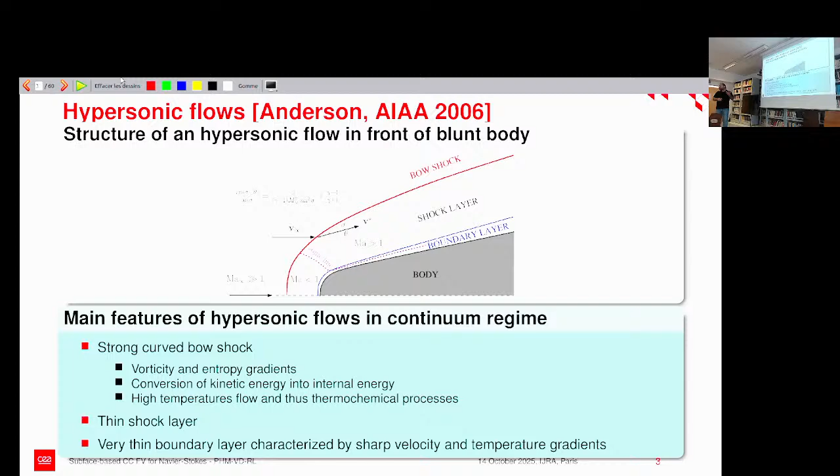And this shock wave is a converter of kinetic energy into internal energy, so the temperature will go up, and you will have a lot of complex thermochemical processes. Due to the fact that you have a thin shock layer, you have also an interaction between the entropy layer and the boundary layer. So this is a very complex physical configuration for the numerical methods, because at the same time you need to be accurate and you need also to be very robust to cope with the shock wave, and very accurate to discretize properly this very thin boundary layer.

So the mathematical model is very well known. This is the model of the compressible Navier-Stokes equation. In blue, you have the hyperbolic part, the non-viscous, non-heat conducting part, which is very well known under the name of Euler equation. And at the right-hand side, you have the viscous stress tensor and the heat flux here. So we use classical constitutive laws plus an equation of state, which might be a little bit complex because due to the thermochemical processes at play in such a flow, you cannot use the classical gamma gas law.

Usually you have a very complex model. This is why I mentioned that for real-life hypersonic flows, a larger number of equations has to be solved, usually with all the chemical species. But in our case, since we are interested in designing a numerical method, we will start simply with the classical Navier-Stokes equations, knowing that the extension to real gas effects is not a problem.

Up to my knowledge, most existing production codes for hypersonic flows rely on finite volume discretization. This is a non-exhaustive list of well-known simulation codes. One exception is the code designed by Dassault people, Michel Mallet and Frédéric Chalot, the AETHER code, which is based on an SUPG formulation, a very original and nice piece of work.

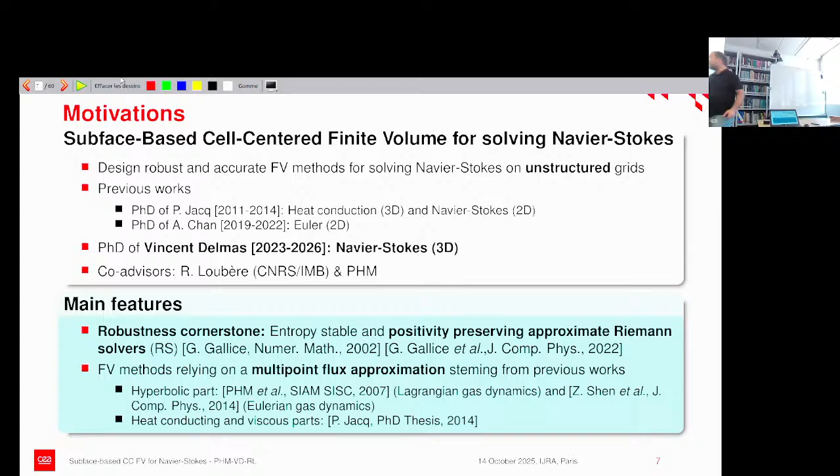Each time, the flux approximation on this face depends on the two states on both sides of the face. This is what I call a two-point flux approximation. For a structured quadrangular grid, this gives a 5-point stencil. In our case, we want to involve also the diagonal neighbors, the other neighbors, introducing a multi-point flux approximation. This is the main idea, and I can skip the slides after because it's technical detail.

I imagine that you know the governing equations, so the multi-dimensional Euler equations with a classical assumption on the thermodynamic closure. Eta is the specific entropy. We assume that we have a convex internal energy potential and a complete equation of state, assuming that the absolute temperature is positive, and so this system is hyperbolic.

You have the eigenvalues here. D is the dimension of the space, and A is the isentropic sound speed. This system is equipped with an entropy inequality in order to discriminate the physically admissible solution when you have discontinuous solutions.

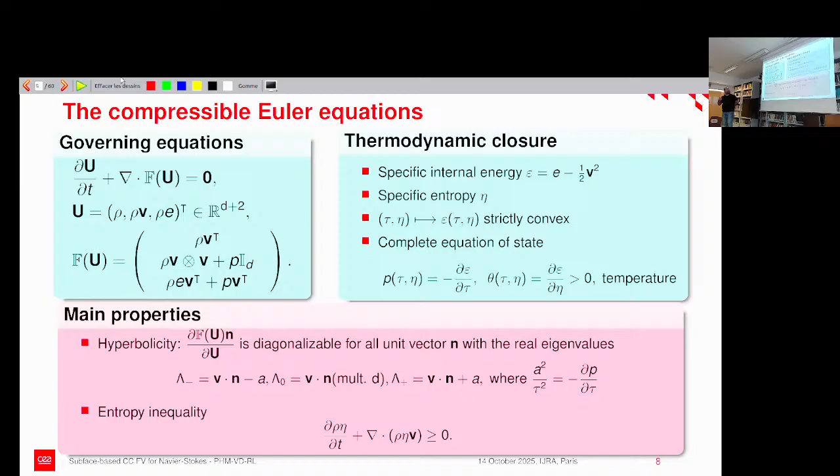So we are interested in designing an interface flux approximation. To construct the flux approximation, we use the cornerstone given by the approximate Riemann solver. For this, we need to define the Riemann problem, so I take the tensorial flux here and project it along the normal direction n, where n is normal to the face of the mesh, and I define this 1D Riemann problem.

I also have the corresponding entropy inequality, and in local notation there is a little abuse of notation because I'm using notation related to the normal and tangential components relative to the face. You recognize the decomposition of the velocity. I just want you to notice that the flux admits a decomposition between two parts: an advective part here with the normal velocity, and a kind of Lagrangian part.

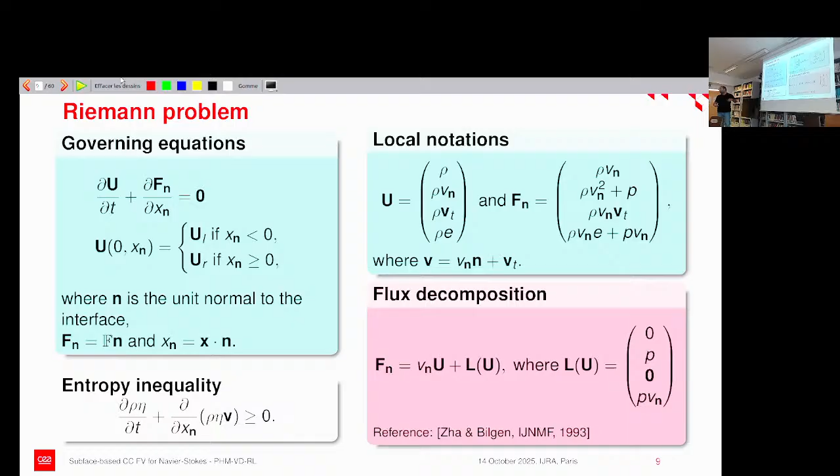Okay, so this natural splitting will be the cornerstone of our numerical methods design. We will reproduce this when we will build our Riemann solver.

So let's go to the notion of simple approximate Riemann solver. This notion has been introduced by Gallice more than 20 years ago. We don't want to use an exact Riemann solver because, practically speaking, it's not possible to use it due to the complexity and the cost of this approach. That's why we go to an approximate Riemann solver.

So I recall you that this approximate Riemann solver is an approximate solution of the Riemann problem I have shown you before. This is a self-similar solution depending on these self-similar variables, and we introduce three wave speeds because this is a complete Riemann solver that mimics the exact solution to the Riemann problem.

And when we set this approximate Riemann solver, we introduce what we call the intermediate states, the UL star, UR star. And what we want to compute is the solution when we have two discontinuous states on both sides of an interface, and we want to go from this state to the flux, in fact. So the intermediate states are written like this.

So I introduce some unknowns, rho star, all the components of the physical variables here. And I will introduce also intermediate fluxes. And you can notice that I use the same decomposition - I mimic the physical decomposition in between advective and Lagrangian part. I impose this decomposition to the intermediate fluxes. So it's a rather strong hypothesis.

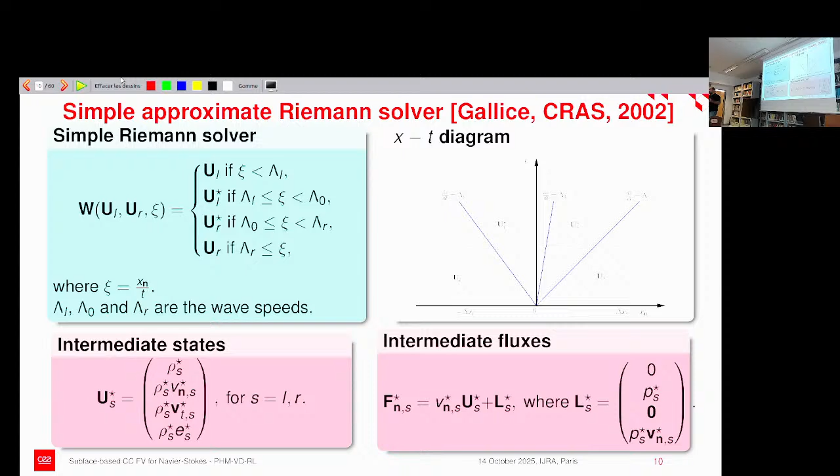And what we're going to do here is that we will impose the continuity of the normal velocity, which is a rather natural assumption. Here, this is the contact wave, and we want the normal velocity to be continuous through the contact, okay? But we will decide to keep a discontinuity in between the pressure, intermediate pressure. This means that we will have a discontinuity through the contact wave between the left and right-sided pressure. This is a rather strange assumption, but this will be the key to derive something different than usual, okay?

Because if I assume PL star equal to PR star, then I will have an equal number of equations and unknowns, okay? And the system is closed, and we will finish with a classical Riemann solver, HLLC type, in fact. It's not really a HLLC, but it's very close to HLLC if we do that.

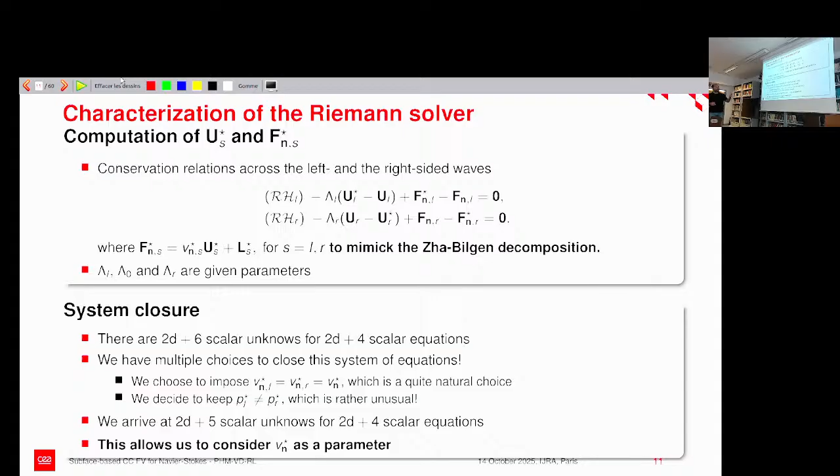So if I maintain the number of unknowns, one more unknown than equations, I can use one of the unknowns as a parameter. And this is precisely what I will do. I will use Vn star as a parameter, okay? And I will show you how I will use this parameter.

And now, if I'm replacing the decomposition of the flux here and here inside the Rankine-Hugoniot equation, and I simply write the first component of those equations, which is related to the mass density, I end up with two mass conservation equations through the left-sided wave and the right-sided wave, like this.

And since mass is conserved through those waves, I can introduce what I call mass flux parameters. It's just a change of unknowns. I will introduce the small lambda, which are the Lagrangian mass, in fact. All these manipulations amount to coming from the Eulerian world to the Lagrangian world, in some sense. I am making a kind of change of variables, in fact.

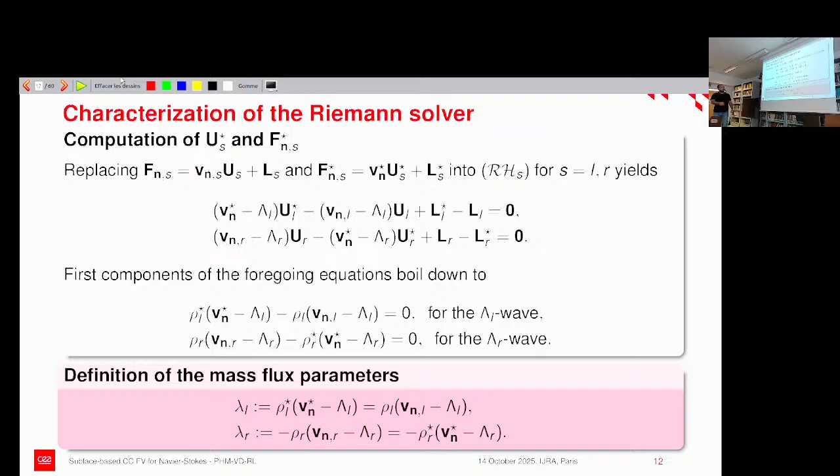And so if I introduce those small lambda L and lambda R, then I can define the wave speed, the Eulerian wave speed, in terms of the small lambda parameters. And I have the right to do that if and only if those compatibility conditions are satisfied. You can observe that this equation is exactly equivalent to that one, and that one to that one.

Okay, and that's why I have written this. So if I introduce this small parameter lambda L, lambda R, my conservation relations boil down to those expressions. The advective part has disappeared, and it remains only the Lagrangian part. Here you have the big U divided by rho, and these are the Lagrangian conservative variables, in fact.

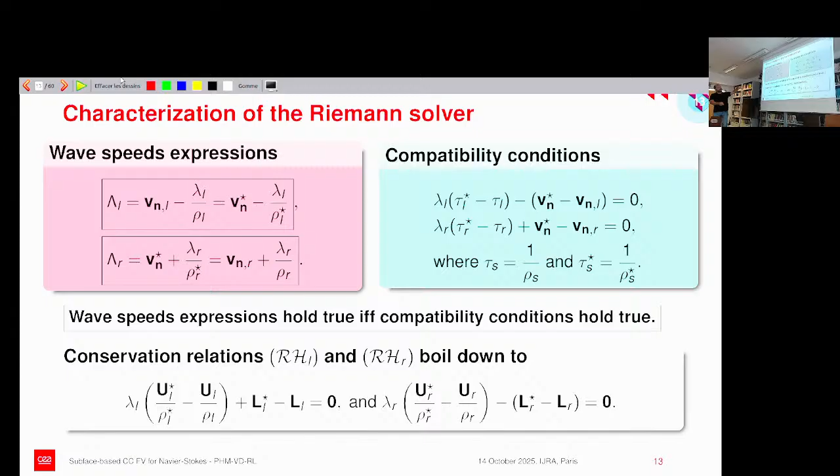Okay? So if I develop completely the left-sided and right-sided equation, I end up with those two systems of equations for the left wave and the right wave. And these are a kind of Rankine-Hugoniot equation.

But beware, be careful. This is not exactly the Rankine-Hugoniot equation due to the fact that here PL star is not the pressure given by the equation of state. It's an unknown, okay? And so I have still 2D plus 5 unknowns for 2D plus 4 scalar equations, and I have my parametrization using the parameter Vn star.

Now it remains to enforce positivity. That is, I want the specific volume in the intermediate state to be positive. I want the specific internal energy to be positive, and I will show you how to obtain that. I need to express the lambda zero wave speed, the contact wave speed, remember, and I need also to determine the interface flux to fit the finite volume discretization.

So this is explained in this Computers and Fluids paper. If you tune the lambda, the small lambda, then you can find values of lambda that will ensure the positivity of epsilon star and tau star. This is a non-linear expression because it depends also on the parameter.

Okay, this simply means that if you need to have enough entropy, you simply open the fan of the solver. Once you have this, then you have the wave speeds ordering, which is very important for us. That is, you can ensure that the right wave is the right wave, the left one also, and the contact is in between, which was not obvious at all, knowing that Vn star is the parameter, okay?

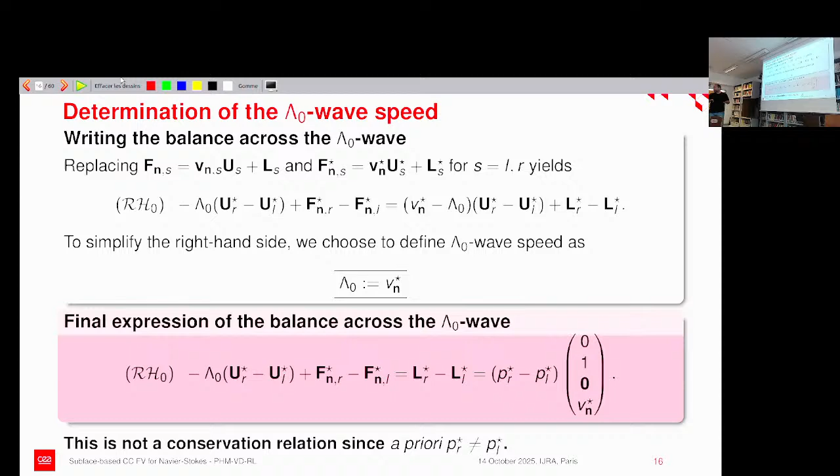Remember, I have assumed that those two pressures were not equal. So, for sure, if I assume that those two guys are equal, then I am conservative and it's finished. Okay? This is the classical way of defining the numerical methods.

Now, let's play a little bit with the theoretical framework introduced by Harten, Lax and Van Leer in their very famous paper, the paper where the HLL theory has been introduced, the approximate Riemann solver theory.

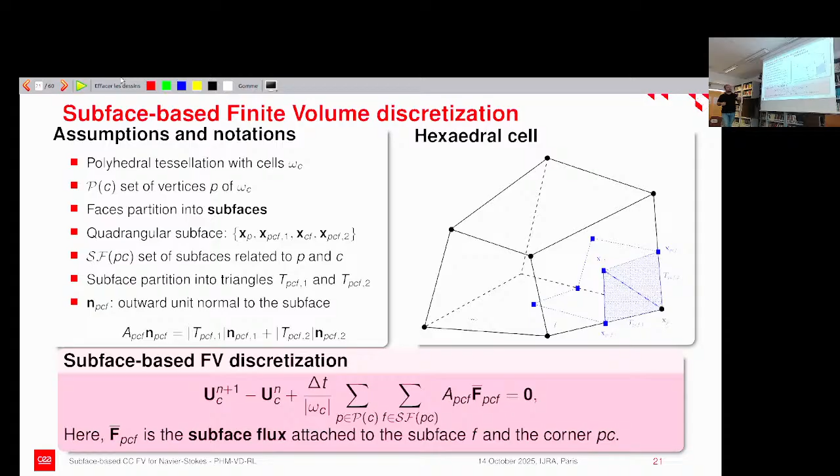So in practice, you can do this decomposition with whatever polyhedral cells you have. And so the main idea here is to have a subface-based finite volume discretization, in the sense that the flux is approximated on each subface. That is, instead of making a summation over all the faces of the polyhedral cells, now we are making a sum over all the nodes of the polyhedral cells, and for each node we are collecting the contribution of all the subfaces. Okay? And here, for instance, for this node, we are collecting those 3 contributions.

Now it remains to define what is this subface flux. Okay, so the same story. We define a Riemann problem along each subface, a Riemann problem in the direction of the normal to the subface, so the NPCF stuff. Well, P for point, C for cell, F for face. It's quite easy for French people.

To compute my flux here, I will use a parameterized Riemann solver, exactly the Riemann solver I have defined previously, with the Vn star velocity as the parameter. Here the left and right states are UC and UD, and Xi is the classical self-similar parameter. I will use the definition of my subface flux using the left-sided part of the numerical flux from the Riemann problem.

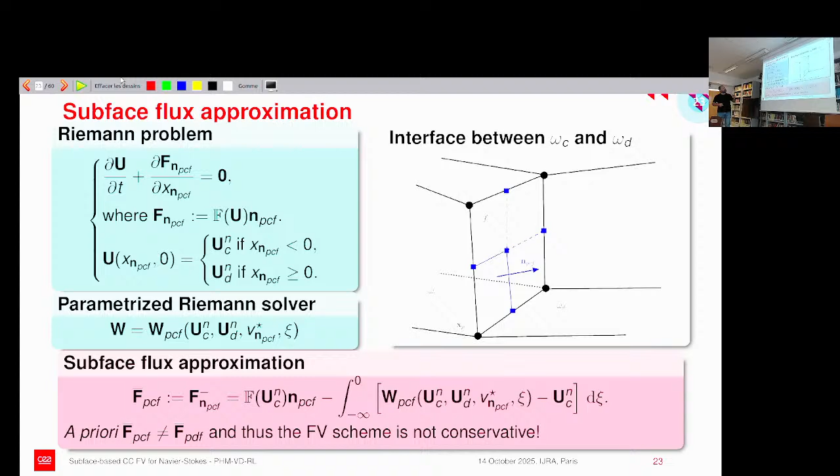Now, it remains to solve a paradox and a very big question: how to ensure conservation, because we want conservation at the end of the day. So this is a quite naive approach here, simply ignoring the boundary condition.

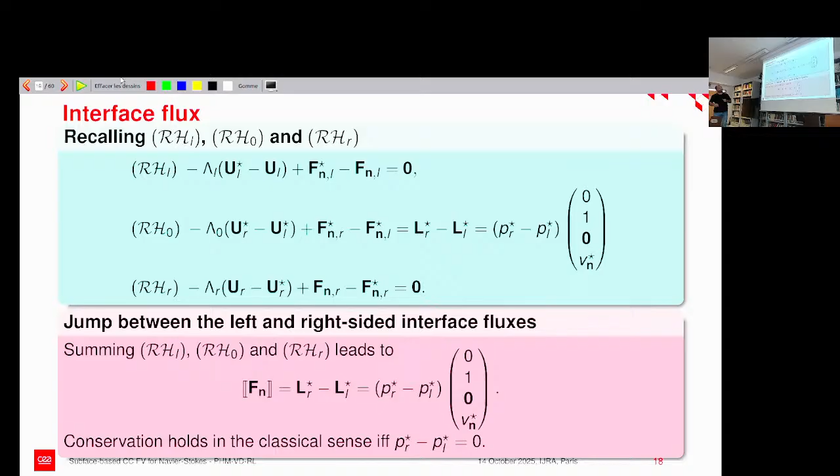Now, how can I finish? I will simply finish by remembering that the jump in between the left-sided and the right-sided flux is simply expressed like this.

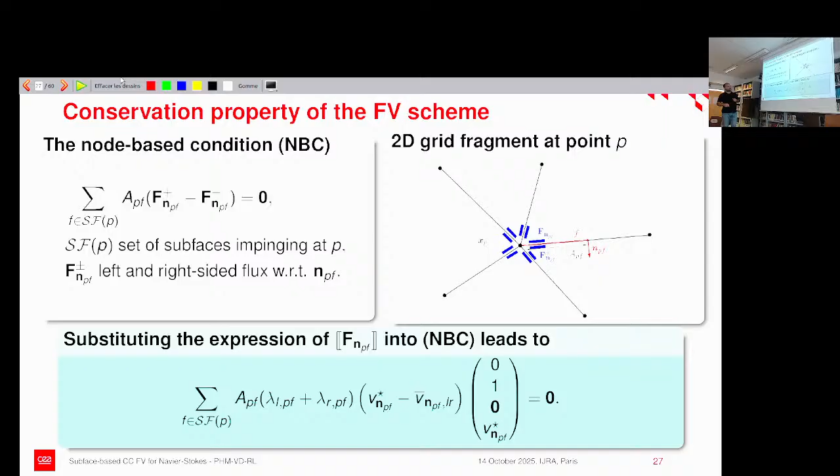In terms of the Vn star and the Vn bar, this is the end of the story here, because if I replace the expression of the jump between the flux, I will end up with this equation in Vn star, which is the parameter. This guy is known, these guys are known also. So it's a vectorial equation. I need to satisfy it on each component.

And so if I project onto the component, I will end up with this equation, this equation. I have as much unknown as I have faces around the node, so rather plenty unknown. I have not, once more, I have not enough equation to close the system. So I will use a closure assumption, which is rather natural, saying that each Vn star parameter for each face,

this is simply the projection of a nodal velocity onto the normal to the subface. And if I do that, I end up this time, so I plug Vn star Pf equal to Vpf.

So in this equation, the vectorial equation, that one will be satisfied immediately, in fact. And I end up with a vectorial system in VP, which admits always a solution, provided the grid is not degenerated, that is, provided you don't have flat elements, okay? And so VP is computed solving this system.

So it's very interesting because it coincides with a scheme that we have designed more than 20 years ago in the Lagrangian framework. And in the Lagrangian framework, we need to move the mesh. That's why we need a nodal velocity. In fact, this is the extension of a previous work done in the Lagrangian framework.

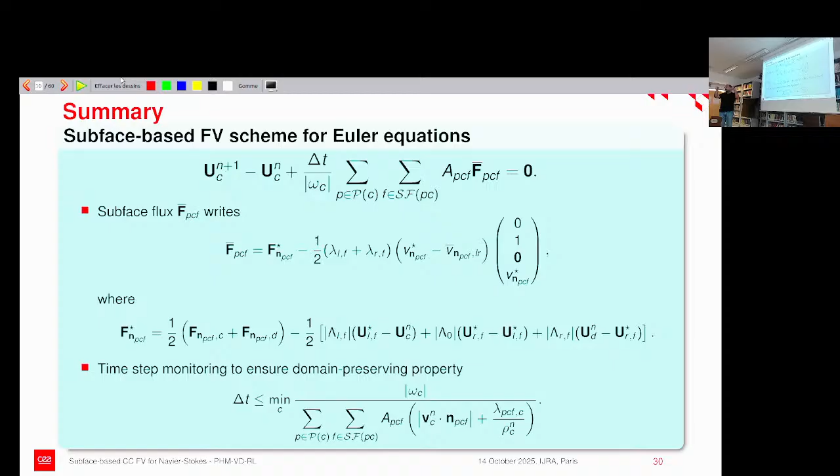And like this, we have the Vn star parameters, and we can compute the flux, and the problem is solved. So this is a summary of the scheme, and in this framework, we will have a connection with all the neighbors around the node, in fact, due to this nodal solver. Because this nodal solver, this is a conservation around all the cells that surround the node.

So at the end, we have two types of finite volume scheme. The classical one, which is face-based, and you have a stencil which is built using the neighbor by the faces. And in our case, we have a stencil which is constructed using the neighbor by the nodes. So there is more multidimensionality in what we are doing. I don't pretend that I have solved a multi-D Riemann problem.

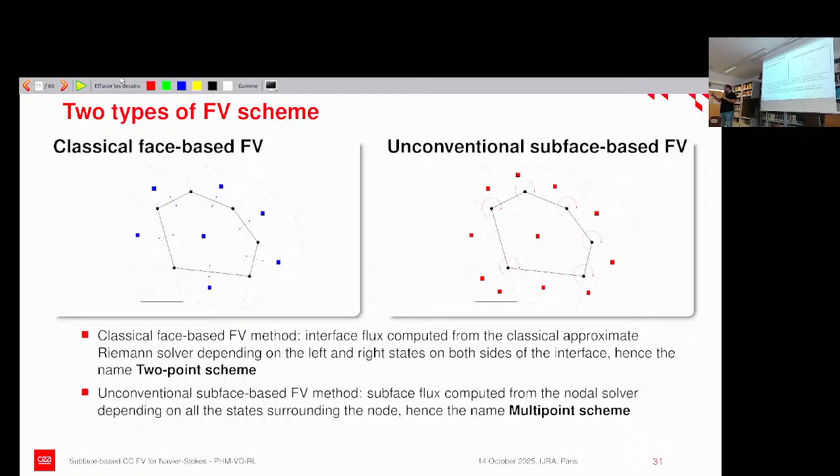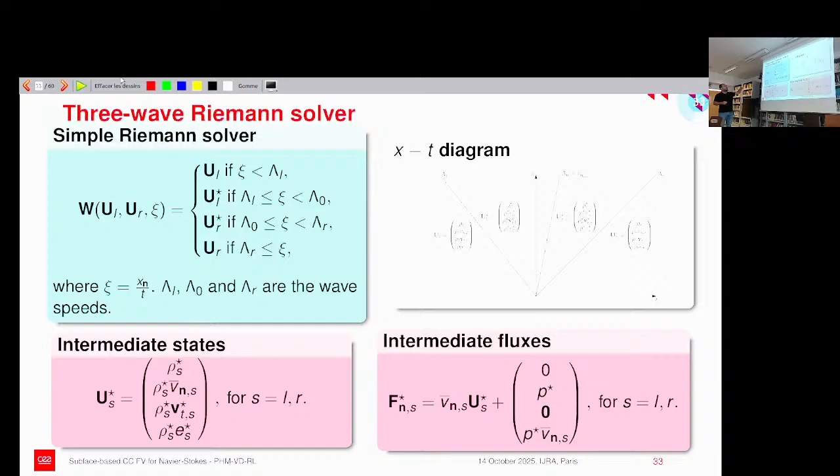So I will skip this because this is some variants of two-point finite volume scheme, because we have also, well, we don't need it.

So I want to show you what is the impact of this type of approach. We are interested in solving quite annoying problems that have been listed previously a long time ago by James Quirk. A very nice paper in IJNMF, more than 30 years ago, a very long time. And this is the 3D extension of this type of test.

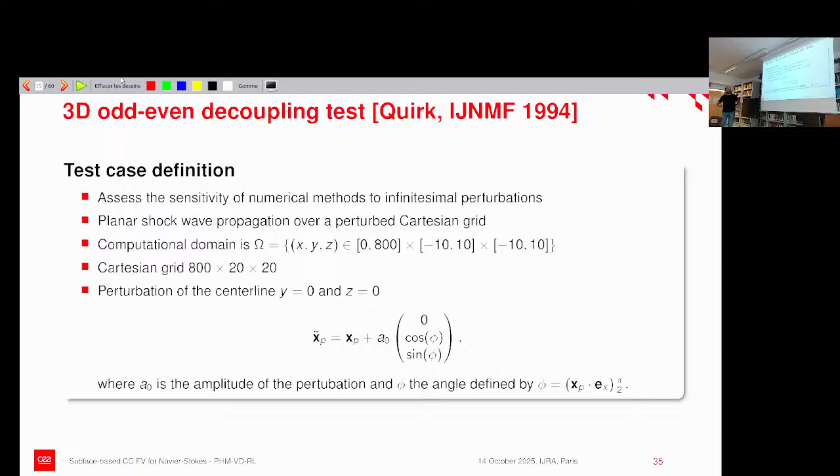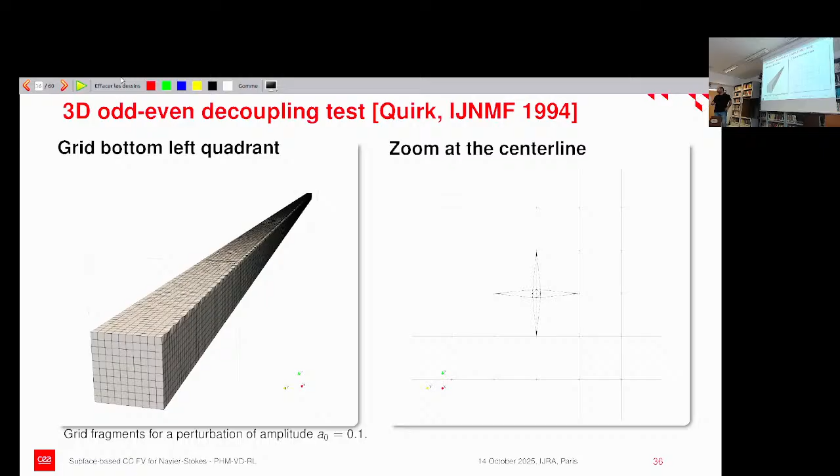So the test is very simple. You have a structured grid. It's a tube here, okay? And you put a perturbation on the center line. I don't know if you see it. So the idea is to move the node on the center line and to perturb it a little bit with a very small amplitude. Here for the figure, it's a very big amplitude. But in practice, we will compute the propagation of a shock wave through this perturbed grid and just see what happens.

Another interesting feature is this Sedov problem. It's completely different, it's not hypersonic flows, but there is an analogy. This is a point blast problem.

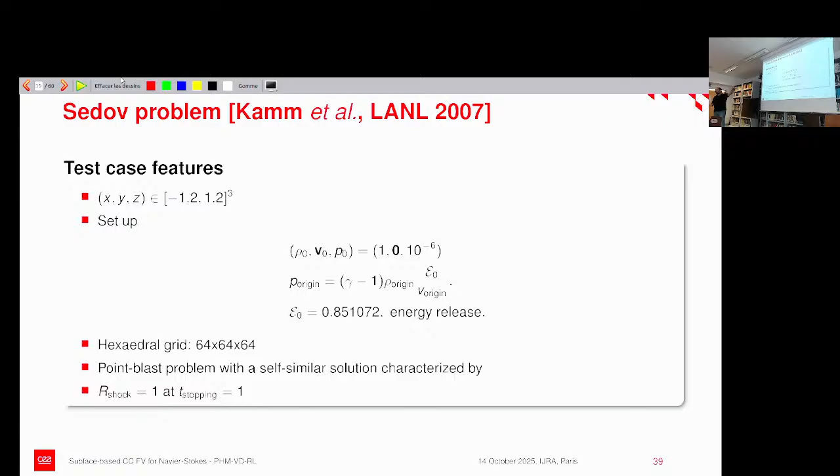At time t equals 0, you have a cold medium, and you put a Dirac of energy at the center, and you will see the emergence of a self-similar solution, a shock wave, a radial shock wave. With a correct setup, you will have a radius of shock at time 1 equal to 1, and with gamma equal to 7/5, you will have a peak of density at 6 — gamma plus 1 divided by gamma minus 1, the classical asymptotic.

So just to see what it does on a real test case, this is the ARD test case. You have, in this paper, a lot of interesting test cases — the atmospheric re-entry demonstrator. This is a demonstrator built by ESA, and I think there is a flight test regarding this.

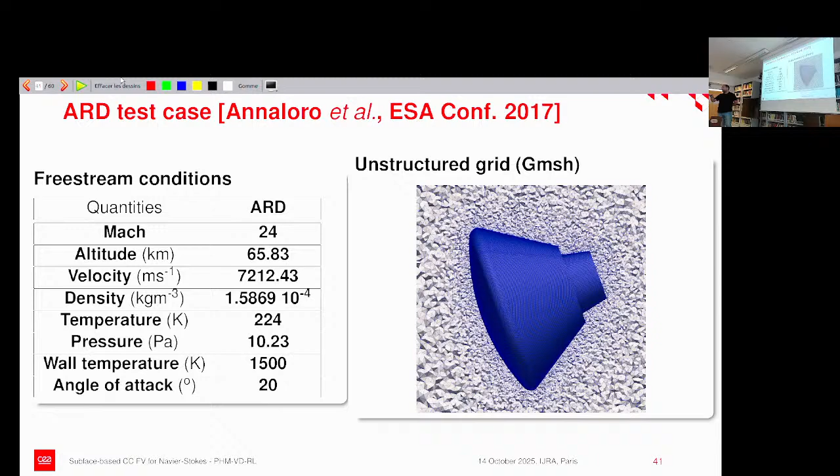You see that you have Mach 24, a very big angle of attack, and it's very painful, particularly in the rarefaction wave here, because you have density close to 0. So if your scheme is not able to withstand this, it crashes.

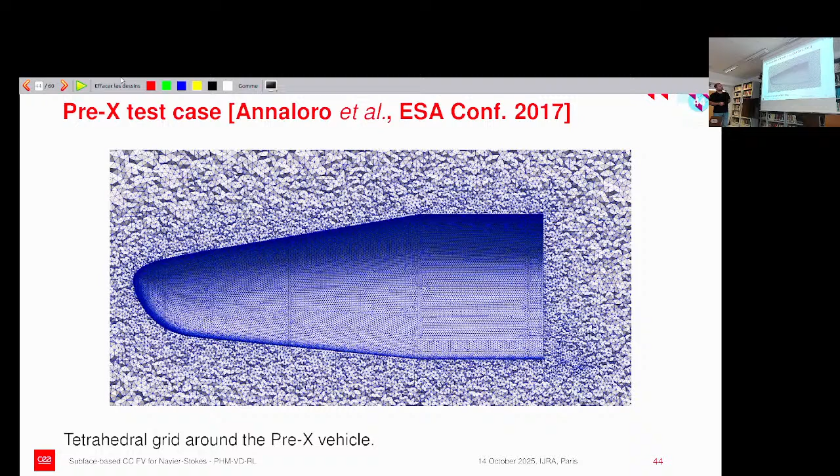So it's Mach 25, and it's also quite challenging. This is a tetrahedral mesh here also. This is Eulerian computation up to second order, and it does not crash at all.

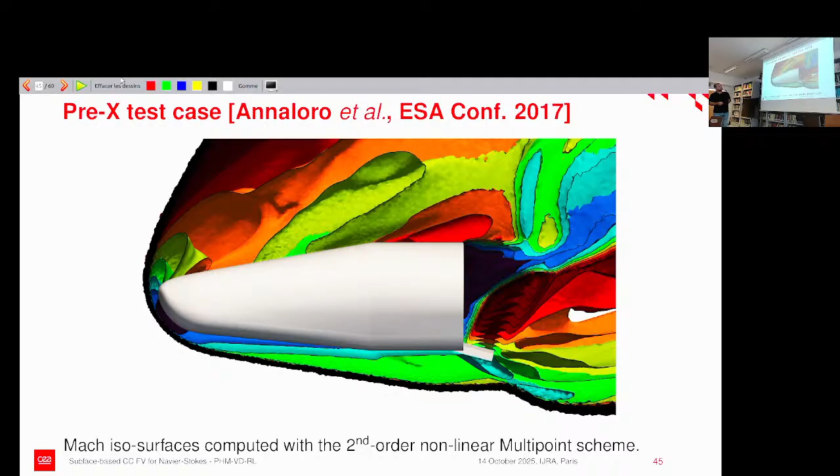Just to assess the accuracy, we have plotted the pressure coefficients for different gradient computations for the second order, compared with the Navier-Stokes code. So we plot the pressure coefficient along two planes.

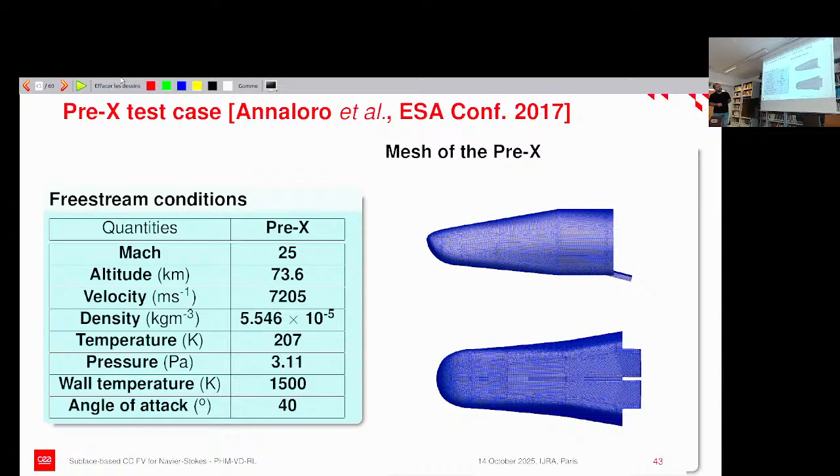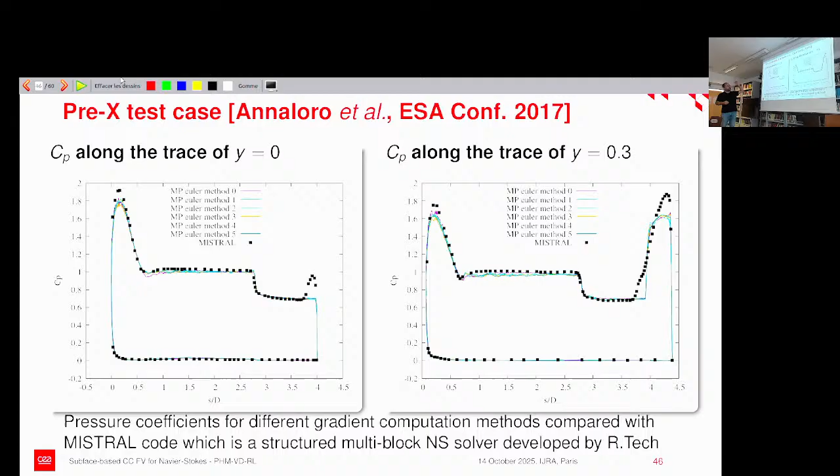There is one plane here along the mid-axis, and another plane along the mid-plane along the flap, and that's why you have a difference here and here. You have discrepancy with the Navier-Stokes solution due to the fact that on the flap you have recirculation that we cannot capture using the Euler computation. But we were quite satisfied to obtain this, because we have quite good agreement everywhere.

So let's move now to the Navier-Stokes equations. We start with a supersonic flow over a flat plate, just to show you the sensitivity of the results with respect to what we do for the hyperbolic part. People think that what is important is the heat conducting and viscous part — I don't think so. You need to pay attention to heat conduction and the viscous part, particularly when you play with cell-centered finite volume schemes, because it's not easy on unstructured grids.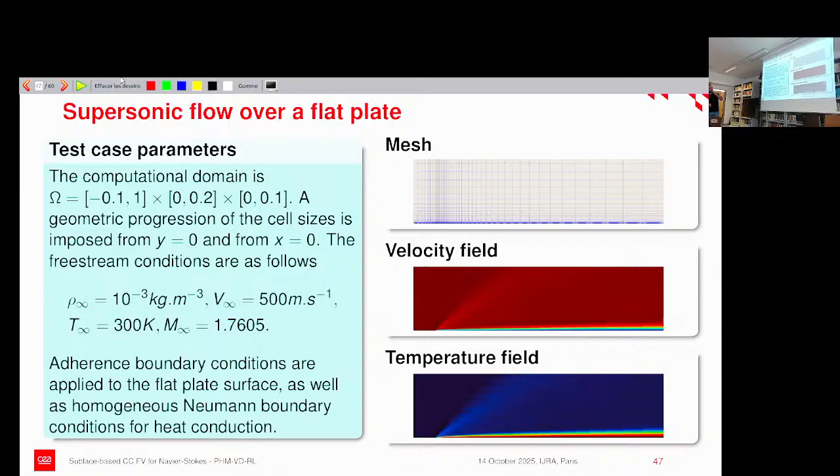At Mach 1.7, so not a very classical mesh. We mesh the boundary layer for sure. So the velocity field, the temperature field, and what is interesting to observe is the profile of velocity with respect to the normal coordinate.

At first order, for the hyperbolic part, you observe that the three-wave scheme, like an HLLC or Roe scheme, is quite accurate. If we use a two-wave scheme like HLL, you have only two waves, left-sided and right-sided, with a mix in between. You don't capture the contact, nor the shear wave, and so you have a lot of dissipation of the boundary layer that produces this.

Forget the modified three-wave. The multi-point scheme is here, so not far from the three-wave scheme, because the multi-point scheme is able to preserve the contact discontinuity, but it does not preserve the shear wave. Still, it has a good behavior on the shear wave independent of that fact.

And so when we go to second order, everybody converges to the reference solution, but you see the effect simply on having a more accurate solution in the boundary layer.

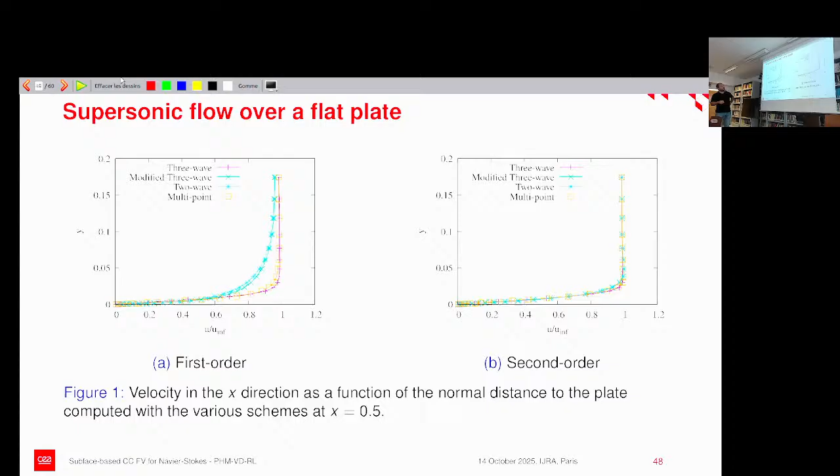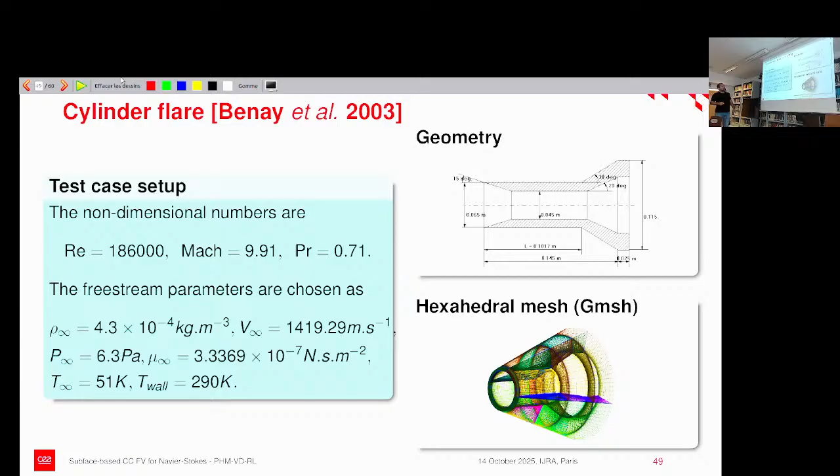So a more classical test case, this is a cylinder flare configuration. It's an ONERA, a very interesting paper, and the configuration was set up at that time to have a 2D axisymmetric solution to validate code. In our case, we are in 3D, so we need to mesh the 3D geometry, so it's a rather costly test case. This is a Mach 9.9 configuration.

At first order for the hyperbolic part, for the pressure coefficient, well, not very good. For the flux, not good at all. You see the huge discrepancy between the different variants of numerical method. The Stanton number is the normalized heat flux, and you really see the sensitivity to the numerical method.

When we go to second order, we will have a more converged solution. For the pressure coefficient, all the schemes give you almost the same result. For the Stanton number, it's another story because we have discrepancy. For instance, the HLL-like scheme will be above, and the multi-point is quite close to the experimental results. So we are quite satisfied.

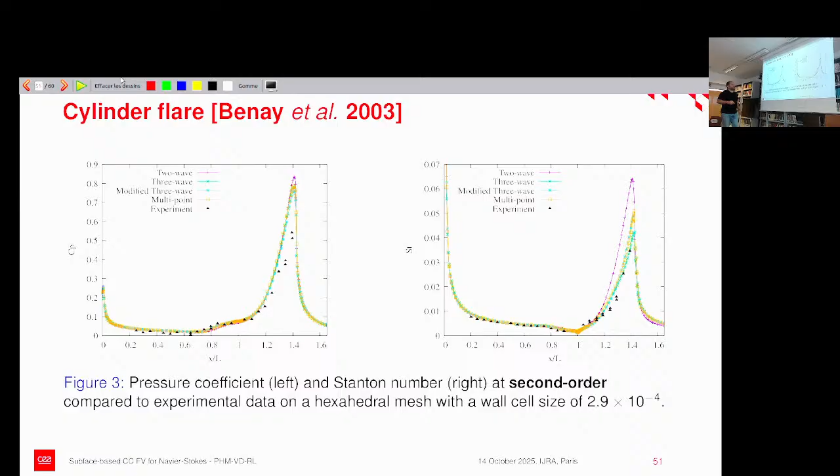So let's progress toward a more demanding test case. This one is a very hard one, almost Mach 20. It's taken from a very nice website from NASA Langley, and they proposed a set of benchmarks for hypersonic flows. I will stop here, and we will use a classical hexahedral mesh.

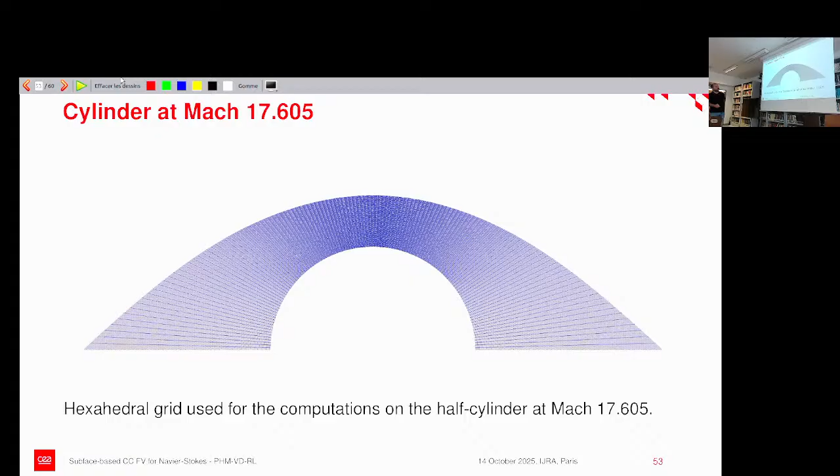The other schemes are completely off. When you go to second order, it's a little bit better, but it depends on what you are doing. With second order, we are playing with WENO-like combinations of gradients, so you have linear combination and non-linear combination. You see that even at second order, the way you do the second order changes the results for the Stanton number, for the heat flux. We still are happy because the multi-point flux is still behaving quite reasonably.

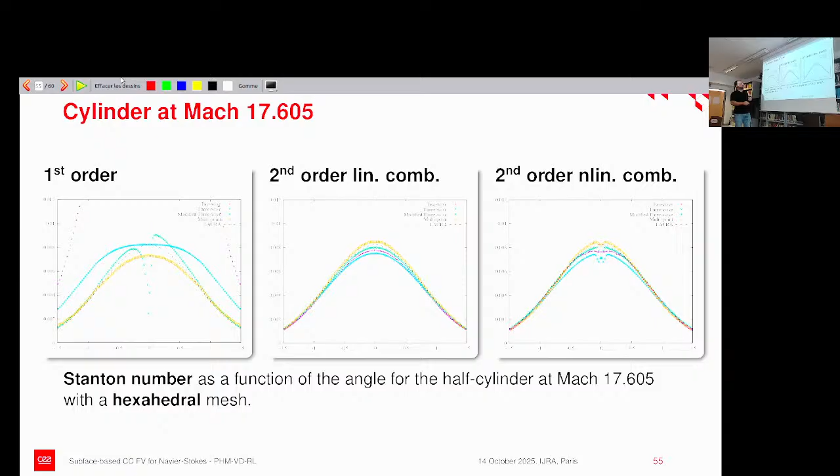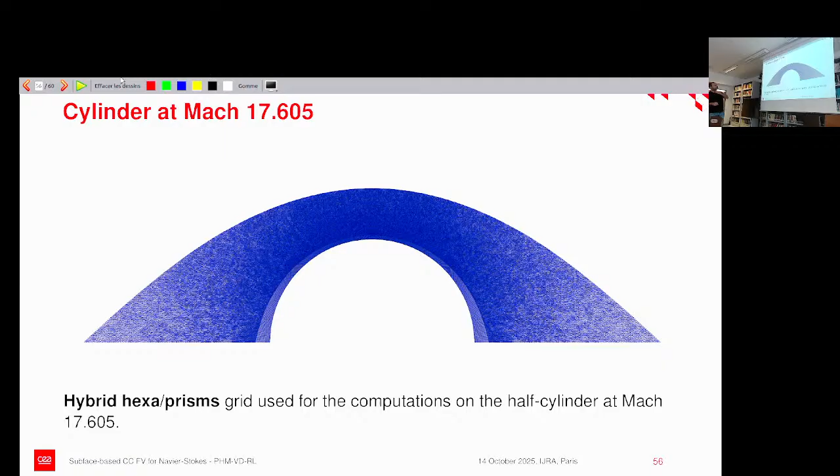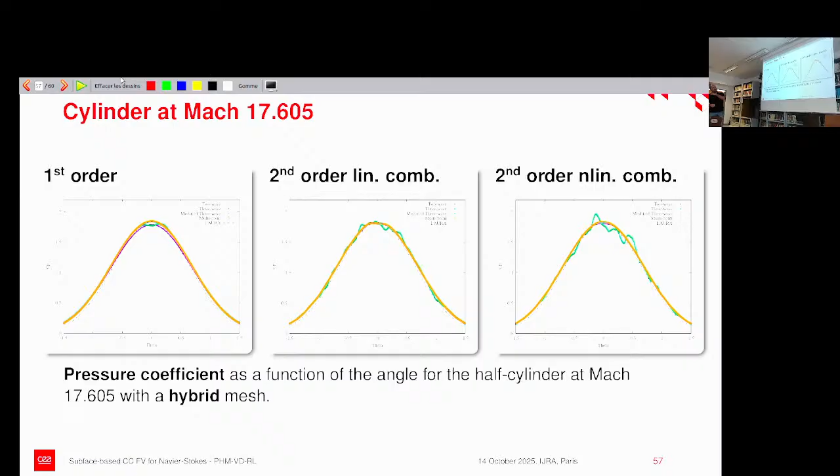Now, maybe the most challenging case: you decide to play with a hybrid grid with prisms near the boundary layer and tetrahedra elsewhere. Even for the pressure coefficient, it's not obvious, but the multi-point is coping with this quite reasonably. The other schemes experience troubles, and if we go to the heat flux, it's a nightmare.

What we observe is that if you have perturbation inside the shock wave, this will propagate to the boundary layer and put noise inside the boundary layer. So you really need to pay attention to the way the shock wave is resolved. Unfortunately, with triangular tetrahedral cells, they are not aligned with the shock, and this creates noise that propagates through the flow afterward.

I don't know anybody obtaining good results on such configuration, because people who are playing with mesh adaptation are cheating a little bit. Usually they put very tiny cells at the boundary, and when you ask them to show a zoom on the solution, you see oscillations on the heat flux, and they explain that they need some smoothing. Here we do not do any smoothing. This is the net result from the numerical method, and it's only finite volume.

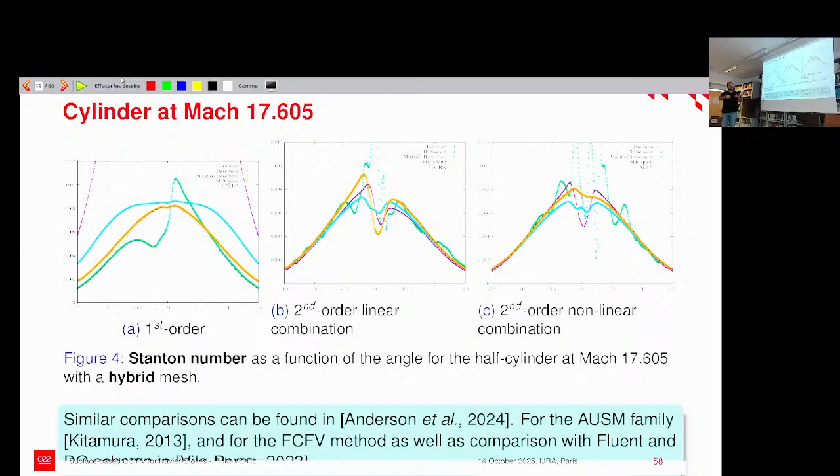My conclusion is that hypersonic heat flux computation is still a challenging task. If I have a word to say, the multi-point scheme brings something new and quite interesting with respect to robustness. We are working on many directions.

We have done interesting work regarding the low-Mach extension with my former postdoc Alessia Del Grosso. We are also working a lot on time implicit discretization, because the results I have shown you were also obtained using a time marching algorithm.

We are working on the ALE formulation, because this nodal velocity, which is used to compute the flux, is very interesting also to move the mesh, if we want to have something intermediate between Lagrangian and Eulerian configuration.

And we are continuing to fight with the Navier-Stokes computation, and I hope that in a few weeks we will have more interesting results. This is the main objective of Vincent Delmas, and the PhD defense will take place next spring, so we are approaching the end. Thank you for your attention.

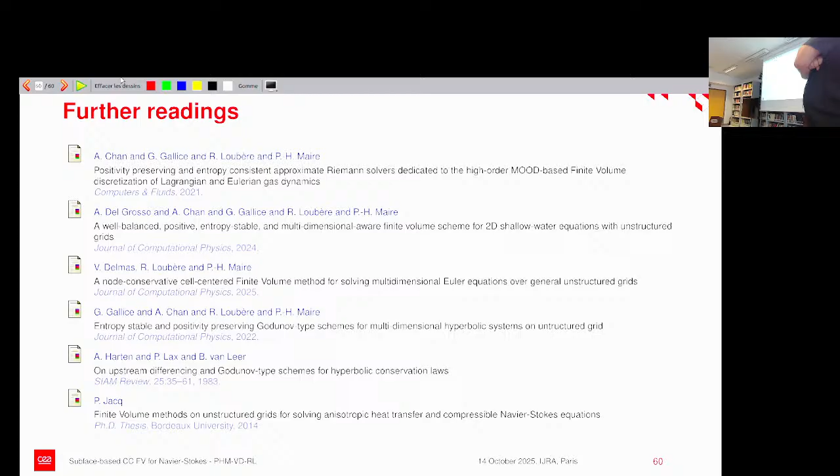Thank you, really fascinating seminar. I wanted to go back to page 38.

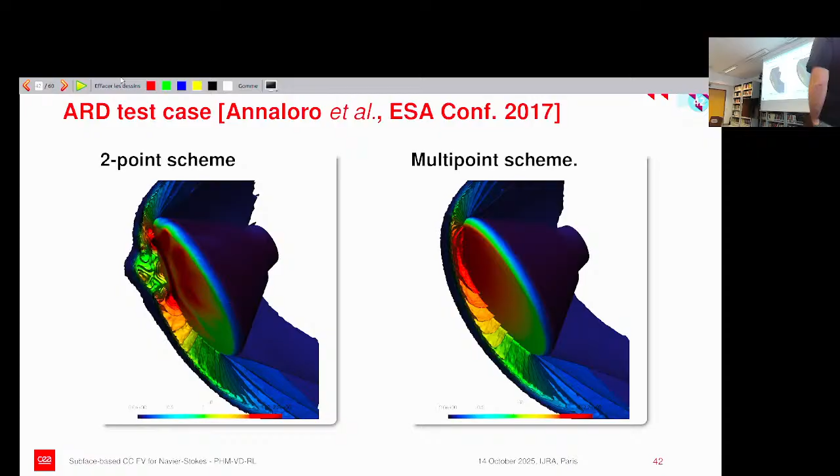I don't understand the meaning of the figure on the right. You seem to say it shows the multi-point scheme is much better, but there are still oscillations. I'm not sure I understood what you wanted to say here. We plot the density isosurface in 3D. This simply means that because you have a shock wave propagating, it's not an oscillation. Yeah, exactly, okay, so this is really good.

And if you go to page 40, I have a really stupid question. No problem, but I just want to emphasize that for me this is a very mysterious test case.

This test case was introduced by Quirk in 2D, because Quirk was playing with AMR at that time, and he was facing very strong difficulties with AMR grids due to round-off machine error, in fact, instabilities were propagating. This is only conjecture, because this test case is very often related to the carbuncle instability, because when you are prone to develop this type of instability, normally your scheme will also develop carbuncle instability. But the other way around, we don't have any results.

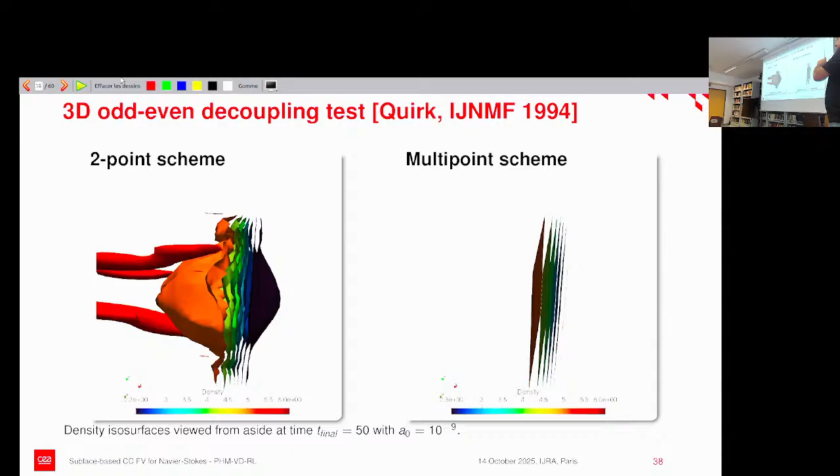Okay, so sorry. LANL, Los Alamos National Laboratory. So it's a report from LANL.

Yeah, exactly, no, I know. Once I was assaulted, also attacked, very violently by a Russian guy at a conference, because he said to me, well, the Sedov problem has been solved by Sedov and not by this stupid Kamm. It was very funny, I was surprised. After that we discussed a little bit, but I said, well, for sure this is the Sedov problem, but Kamm has done very nice work in the sense that he proposed a kind of normalized setup to obtain the solution very easily. Okay, so this is probably not the same Cam that I know, I know Roger Cam from MIT. Jim Kamm. Team Cam.

Yeah, thank you very much, it was very nice and clear for a complex topic. So thank you, thank you.

I have a very naive question: all these schemes, in a way, try to regularize the shock, introducing subgrid scale dissipation or mechanisms to regularize. How do we know there aren't physical mechanisms not taken into account, or which you could add, that would give a physical regularization? Of course there is some physics, for example the entropy condition is physical. But if I imagine a very high Mach number, you would have ionization, all sorts of mechanisms which can regularize the shock. So would it be interesting to look at these mechanisms to add them to numerical schemes, maybe?